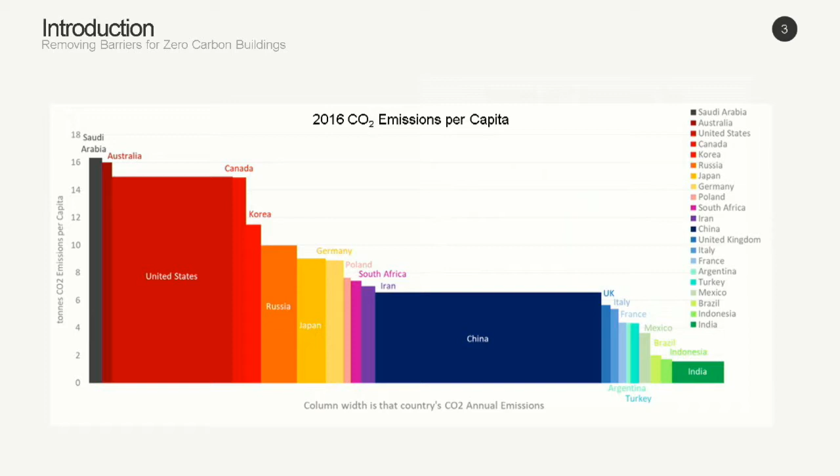Another important factor in what we're talking about in the building sector is that our buildings in cities like Toronto and other urban areas are actually responsible for over half of the greenhouse gas emissions. So 52% as of 2017 in the city of Toronto, GHG emissions are coming from our buildings. The other significant pieces are transportation and waste, and really the biggest factor is heating our buildings for space conditioning and domestic hot water.

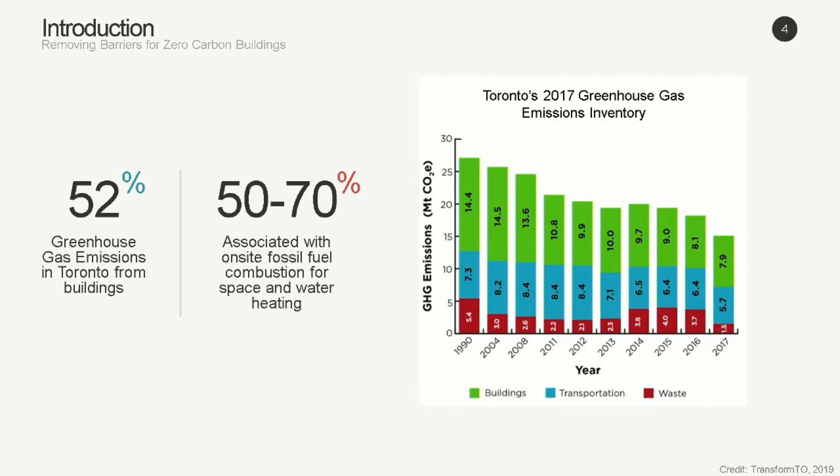That largely comes down to combustion in our buildings. We've got these big natural gas boilers that we use to heat our spaces and condition our domestic hot water. So really, a big area for opportunity in the building sector, particularly in the way that we heat our buildings.

Our mayor, John Tory, declared a climate emergency. This was unanimously agreed on by City Council — I can't remember the last time City Council agreed on something unanimously. So obviously there is a lot of political, societal, and even economic drive to make these projects happen, to make our buildings cleaner, to reduce our GHGs as a whole. Our commitment has once again been declared by the city that we need to reach our 80% reduction targets by 2050. This is being taken very, very seriously.

So again, what is it that's actually holding us up? Why have we not gotten there yet? One of the challenges is defining what a high performance building is. I've left that ambiguous because different folks have taken a crack at defining this, and everybody has different beliefs on how we should go about reaching the masses. Certainly there have been a number of efforts that have already worked and continued to drive this movement forward.

First, I want to define the problem here. Let's take a look at some different types of high performance buildings, and we can discuss the pros and cons of getting there before we talk about how we actually implement these things.

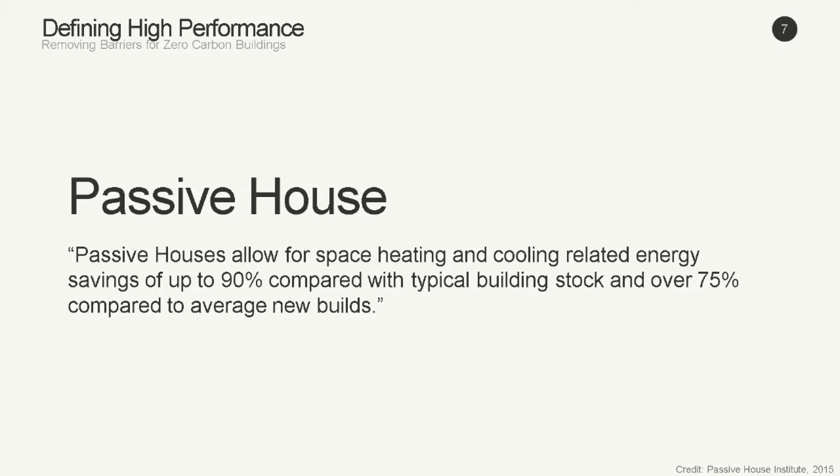Although it's sort of based on really good building science fundamentals, you still have to get certified pieces, components, windows, HRVs, things like that, which makes this a bit of a challenge and not necessarily for the masses quite yet. There's still a lot of barriers getting in between us and this final product.

And they retrofit this building, and it's going to meet the International Passive House standard. It's still under construction, and one reason is that they had to order all of these Passive House certified windows, which can really hold up the process. Again, when we're trying to get these buildings out to the masses, putting barriers like that in front of us can be a big challenge. So it's doable, but it becomes a challenge on its own.

The other part of this to remember is that we've not necessarily gotten rid of all of our energy. We've significantly reduced it, but there's still a fraction that's going to remain. So if we think about getting to the next level, we can think about things like the Living Building Challenge from the International Living Future Institute. There are many petals to the Living Building Challenge, but one particular petal of interest here is the energy petal.

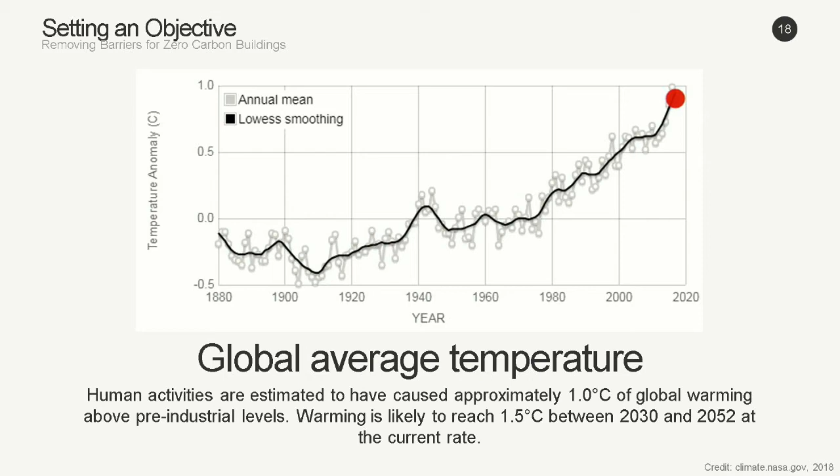We're starting to see these trends year over year: hottest year on record, extreme temperature broken again, dry seasons, forest fires—all this is really coming to the forefront, and the data is right in front of us. This chart, again from NASA, shows the warming trend over the globe, and it's very striking—you can see that year over year we're continuing to get warmer.

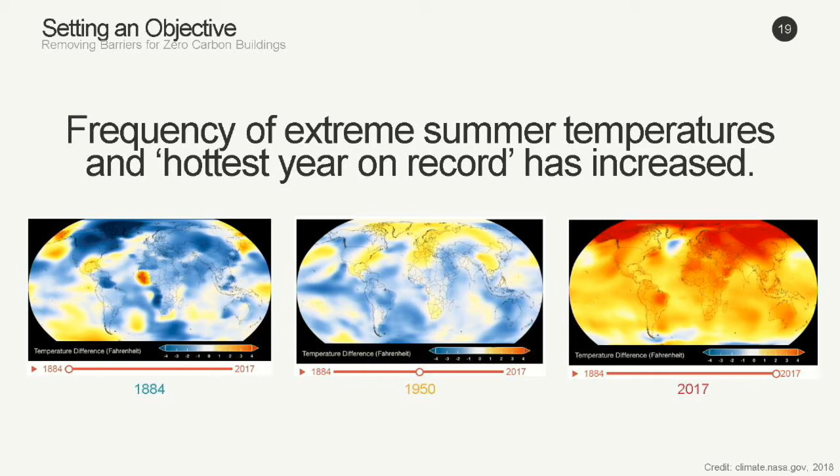But as we approach our modern era, we see this exponential jump in our concentration of CO2 in the atmosphere, and this is really the alarming point here—you can see our numbers are approaching 400 parts per million.

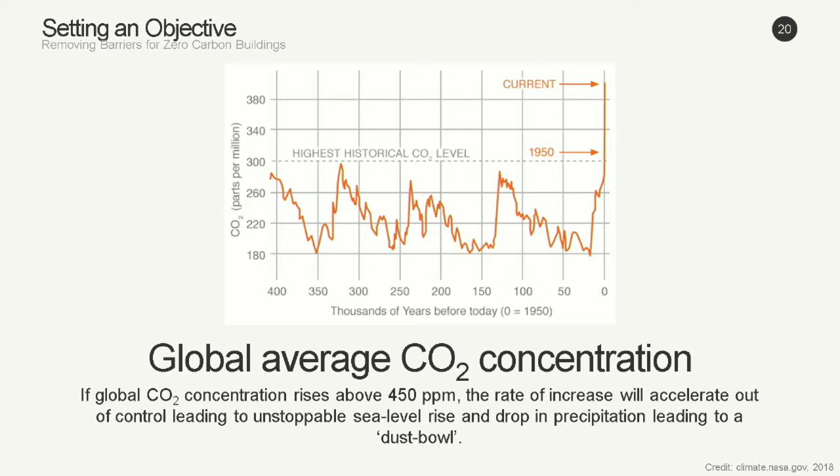The big issue here is if we let this CO2 level get above 450 parts per million, we're going to have this irreversible cycle. It's going to get to a point where the rate of warming accelerates beyond what we can control, basically beyond recovery, to a point where we have sea rise levels that become very dangerous, as well as what they call dust bowlification - extreme periods of drought leading to water shortage and eventually food shortage.

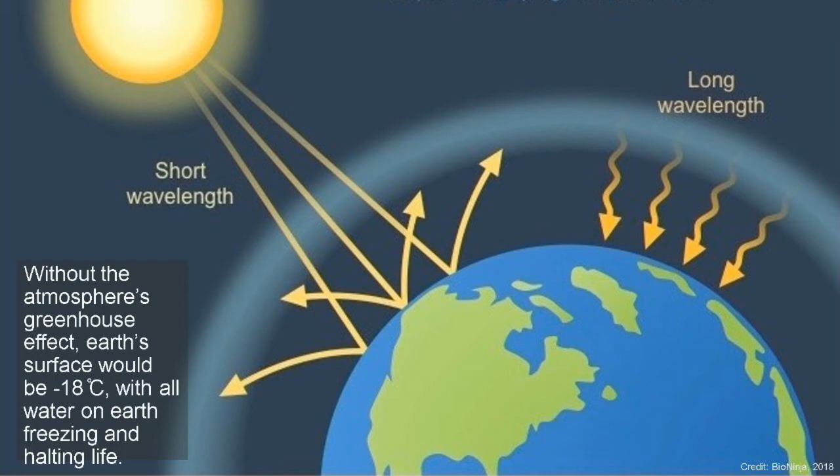So if we look at the science of what's happening here, we start with this image of our Earth and our atmosphere. The atmosphere is really, really important. If the Earth did not have the atmosphere around it, the average temperature on Earth would be minus 18 degrees Celsius, which would basically mean all of our water would be frozen and life on Earth would cease to exist. So this whole atmosphere causing this greenhouse effect - we allow the radiation from the sun to get into our atmosphere, it warms the surface of the Earth, and then as that heat tries to escape, it gets captured by the atmosphere. So this greenhouse effect is really one of the reasons why we're all here today. Really crucial to our life.

What gets really dangerous here is that as we inject more and more CO2 into our atmosphere, it starts to drive a cycle that is somewhat self-propelling. As we add more CO2 from things like coal plants and transportation, it starts to warm the atmosphere. That warming starts to melt the ice, and ice, which is light and reflective, instead of bouncing solar rays back into space - when the ice melts, what we now have is dark water and dark land that will start to absorb that heat energy. So this self-propelling cycle of heating is causing ice melting, which is causing more heating. We're starting to see this runaway effect from that.

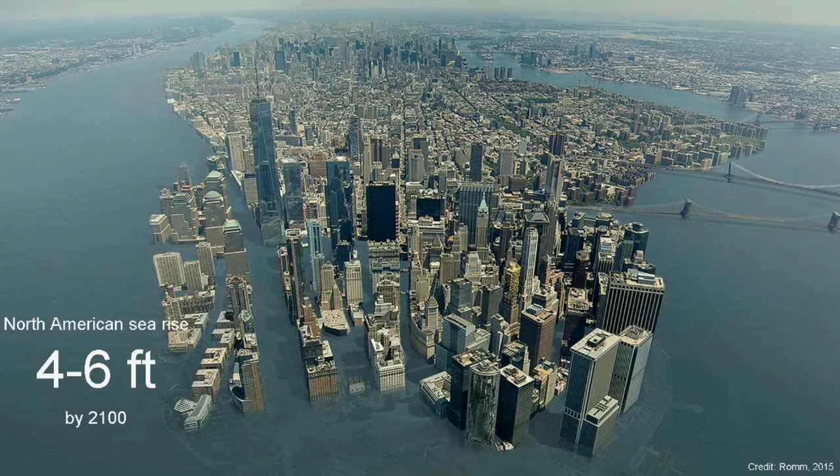Again, there's this issue happening, and the folks making decisions, these big businesses, are even starting to take note. So not only is that sea rise event a potential threat, this risk of destructive events is another big threat. And I would say that this is actually the biggest issue that we're facing here.

When you think about weather events and climate events, there's sort of an 80-20 rule or a 95-5 rule of destructive activity. Events like mega hurricanes show a disproportionate amount of damage done by very few. So the Katrinas, the Sandys, those few hurricanes that typically would happen maybe 1 in 100 years, doing 80-90% of the damage, are now starting to happen more and more frequently.

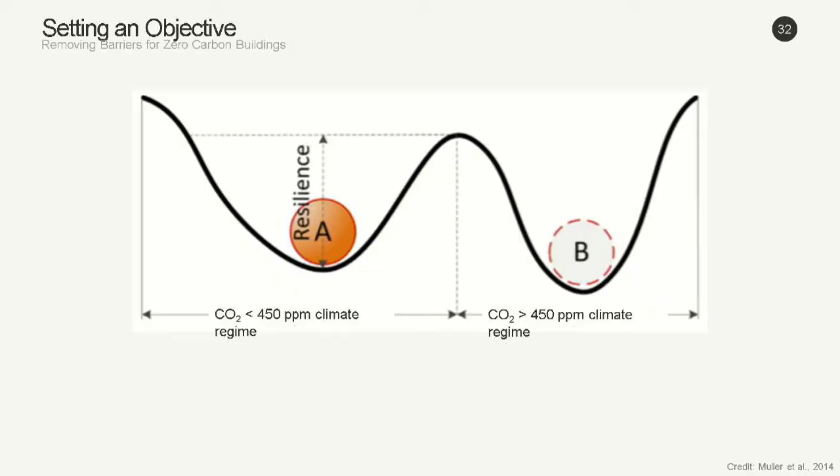Instead of thinking of this 2-degree or 4-degree warming condition where we can all sit on the beach, we need to be careful of this potential future where we have mega floods, mega droughts leading to food shortages, leading to scarcity and competition. And the time is to act now.

Here's an image of something we call a climate regime shift, where our world that we know is living in this left-hand side, where we've got our atmosphere in an equilibrium maintaining the conditions we're used to. If we shift that CO2 across to the right and get out of our current equilibrium into a new equilibrium, we're going to start to see the damage I just described, and it's going to be a very hard, if not impossible, task to reverse that trend.

So, when we think back to my original question - why have we not done this yet - this is kind of how I see this problem, and why now is the time to act. We certainly need to take care of this before we get into this unprecedented climate regime on the right-hand side. So the other big question, now that we've established the main reason we're doing this, is: how do we get these design principles adopted? How do we get people to buy in?

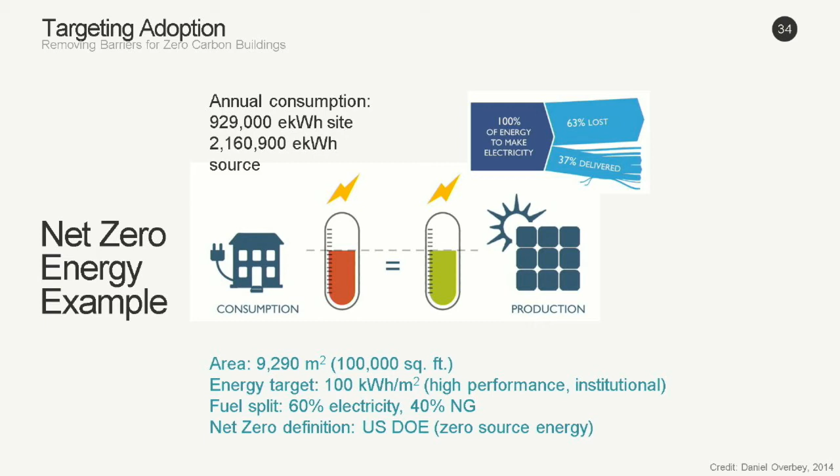Given this situation, we would end up using just shy of 1 million total kilowatt hours of energy over the year. And so to meet this net zero energy definition posed by the U.S. Department of Energy, I won't poll the audience here, but just think in your head, how much photovoltaics do you think you're going to need to offset this building? A few panels, a lot of panels, just put that number in your head.

So it turns out the answer is 3,900 square meters of photovoltaics needed. That's on the order of a football field requirement of PV panels. That's a lot of PV, right? You can see that the investment required there is about $1 million or a little over $1 million to offset all of the energy.

And so we've seen examples of this. If you look at, for example, the Bullitt Center, or even Mohawk College, which I know I said was net zero carbon, but they're also in fact net zero energy. The trend that you see is that a building of that size, typically anything over 4 stories especially, is almost impossible to outfit with enough photovoltaics to reach net zero energy.

And so the trend that you end up seeing here is you have the entire building covered with PV, and then you also have 3 or 4 buildings or a surrounding area also covered with PV. So this, in my opinion, is quite a challenge, and certainly any building that is in a dense urban area that's very landlocked is not going to have an easy time finding this amount of area. Apart from the cost, just the area to actually put this many PV panels on is going to be really, really challenging.

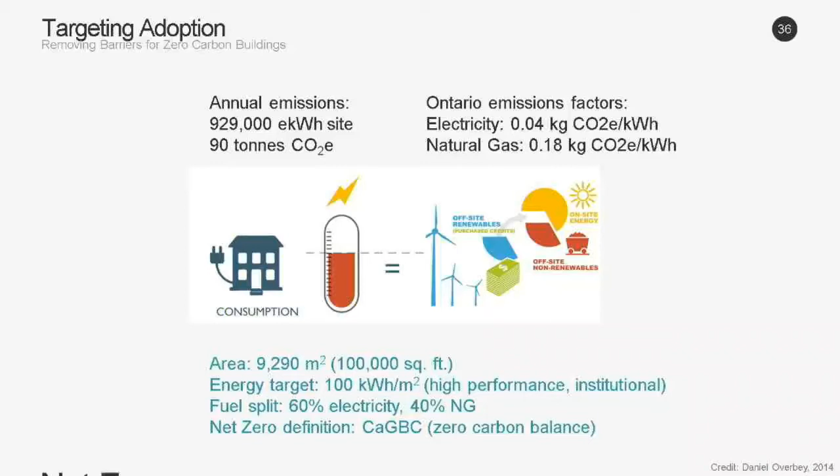So now let's jump over to net zero carbon. Again, remember, we're thinking about the ability to actually deploy this stuff. How adoptable is this? If we take the exact same building, 100 kilowatt hours per meter squared on 100,000 square feet of institutional building, what is the requirement for a net zero carbon building?

We're going to take the CAGBC definition of net zero carbon, which was introduced about 2 years ago to the market. You guys can go do some reading on what that entails. But basically it says you must have a minimum of 5% renewable energy on site to offset your on-site energy, but then you can look to other places to get the rest of your carbon offset. So that includes basically things like off-site renewable energy, renewable energy certificates, which is sort of buying the right to the environmental attributes of an off-site generation plant. So if you've got a solar farm down the street, for example, you can basically be buying those electrons to offset the carbon on your building.

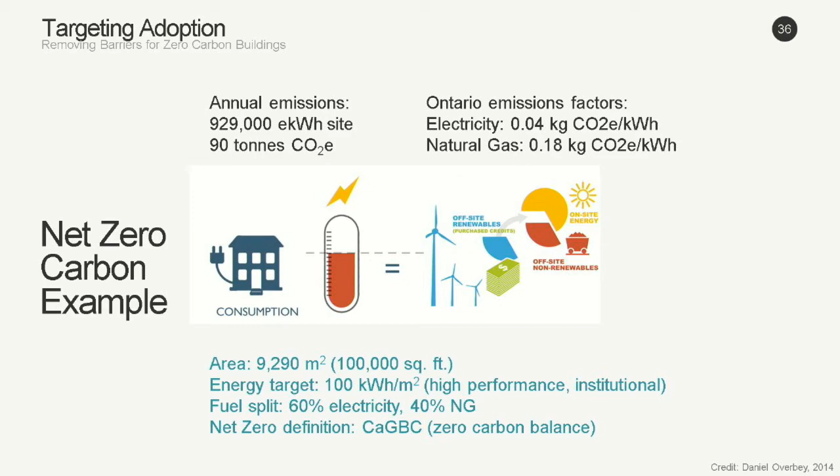So again, if we think back to this net zero energy versus net zero carbon issue, and we said that the last example had approximately a football field of PV requirement, I'll give you a second here to think about what the requirement is for this. It turns out that it's much more approachable. Instead of needing a football field worth, we need 16 by 16 square meters. This is something you could very easily put on your roof or on your building somewhere. And the capital cost here is going to be under $100,000. So certainly, if you're thinking about CapEx costs, this is something that's a little bit more approachable.

The one difference here is that instead of putting the upfront cost to buy your PV cells, you're sort of buying the rights to your renewable energy credit, or your renewable energy certificate, and offsetting in another way. So instead of putting the upfront capital investment, you're taking this net zero carbon approach through an operating cost. Now, again, there may be some critics that say, well, okay, you're buying your way out of the situation.

I would argue that the net zero energy strategy is very unrealistic for most buildings. If our goal is carbon reduction, this is a much more palatable approach for many cases. So when we go back to that question of which is the right definition, there's of course no right definition, but the question should really be which approach aligns with our objective of carbon emission reduction for climate change, and what can we get to the masses with. I firmly believe the answer lies in a net zero carbon approach.

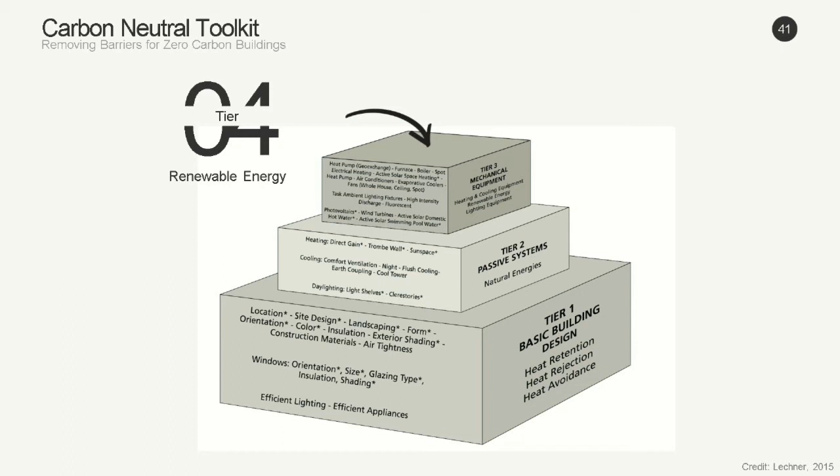The first step is reducing your load. Remember we talked about that 100 kilowatt hour per meter building - the first step is targeting that number, targeting energy efficiency and heating and cooling load. Once you've got that load down and energy demands reduced, then you can think about putting on the right mechanical system, and finally think about generating on site, only after all of the rest of the building is taken care of.

We'll jump through one of these examples, bringing it back to the Passive House folks. Passive House is perhaps not the right certification approach if you're thinking about what to call your high-performance building, but certainly this is the best approach in terms of building physics, and this is very fundamental in its strategy in reducing your heating and cooling load.

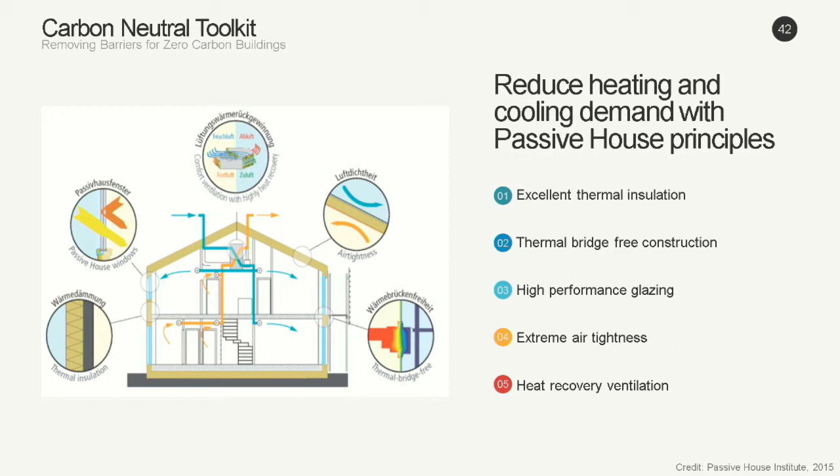This is things like good insulation, mitigation of thermal bridges, really good windows, really airtight buildings, and good heat recovery ventilation. That's going to bring our heating and cooling load down to a point where we can start to address it with a much smaller mechanical system.

The next step is to reduce our lighting loads. Here's an example of somebody who's got a light shelf that'll help bounce daylight into the back of the room. Interestingly, once you get into these really high performance buildings - typically for an average building the highest load is heating and cooling - once we get to these high performance buildings, our lighting load often becomes one of the worst energy sucks. We get to a point where we can't reduce any lower and still work in a lit room, we'd be working in the dark. So that becomes one of the highest loads.

Same story goes for our equipment load. That's the next piece we need to address - after heating and cooling loads, get our electric loads as low as we can. This means eliminating these pieces where possible. Of course if you're a data center or a commercial kitchen, that's not possible, so we look for other ways to use that energy, like heat recovery or load sharing, where we take heat that would have been rejected from one zone and put it into another zone.

After we've addressed all of that, we want to start looking at a super efficient mechanical system. Instead of putting in a natural gas boiler that's 70, 80, 90% efficient, if we can look at a heat pump, all of a sudden that efficiency goes from 90% to 300%, 400%. So some really interesting technology out there allows us to drastically reduce the energy required for our heating systems.

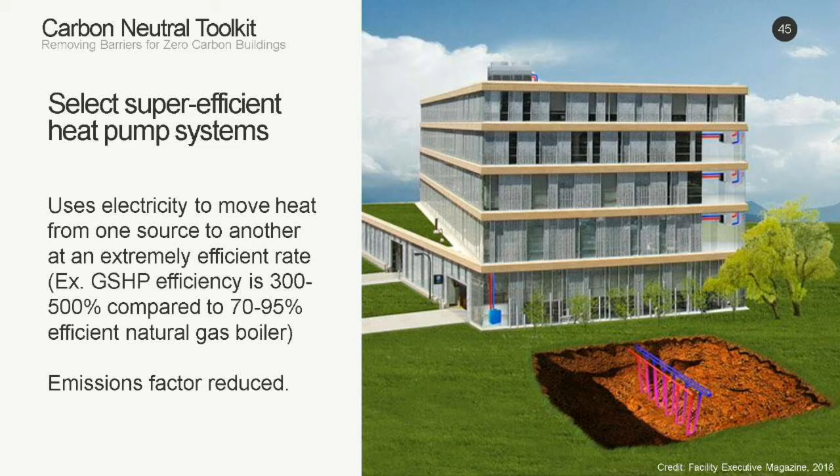The other really cool thing is particularly in provinces like Ontario, British Columbia, Quebec, where our electricity grids are quite clean, right? They have a lot of renewables, or in Ontario's case, a lot of nuclear energy. Switching to electricity is a really good way to reduce our carbon emissions. We fuel switch from on-site combustion to clean electricity, so we get a bump in our emissions reductions there again.

And then finally, on the broad scale, once we go beyond the scope of one building, we want to start looking for opportunities to get into district systems. This is an example of something that would be an excellent case where we've got a really big IT load, for example, from a Facebook or a tech company that would have a bunch of servers. Instead of rejecting that heat out into the atmosphere, we can start grabbing that heat and putting it into our neighbor's building, which is asking for that heat, and do some really cool things. The other way to do that, of course, is with a district energy system where we save on infrastructure and can have a more efficient system to distribute to the local community.

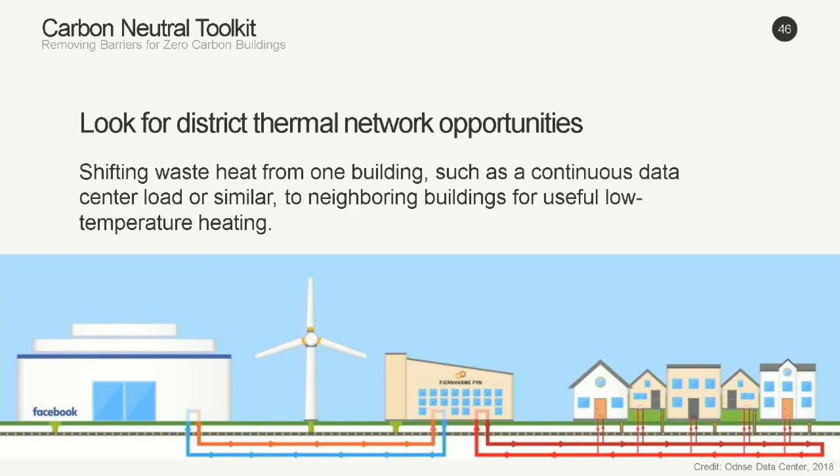So once we've addressed all of those pieces, then and only then do we want to start looking at renewable energy. There are tools like PV Watts or other online calculators, or you can go into your textbook and figure out how to do this. But once we've gotten the loads as low as we can, then we want to start thinking, okay, how much room do we have on the roof or adjacent land to start putting on PV?

There are certainly other renewables like solar hot water. You've all probably heard of wind and these sort of other things. Typically, bang for your buck, PV is the way to go these days, not only in terms of economic reasons, but in terms of load matching. So solar hot water, for example, you have a lot in the summer, you don't need that much in the summer. You need a lot in the winter, but you don't get as much in the winter. So generally speaking, our renewable energy strategy on a building scale is going to be photovoltaics.

Once you can start going outside of your boundary, you can start to look for things like bigger generating production plants. And then the last piece of this is the competing strategy between photovoltaics or on-site renewables and renewable energy certificates. The general approach here should be, if we're going to try to get to net zero carbon, you want to balance that space requirement and capital outlay requirement with how much you can put onto your operating side to buy your clean energy at a bit of a premium.

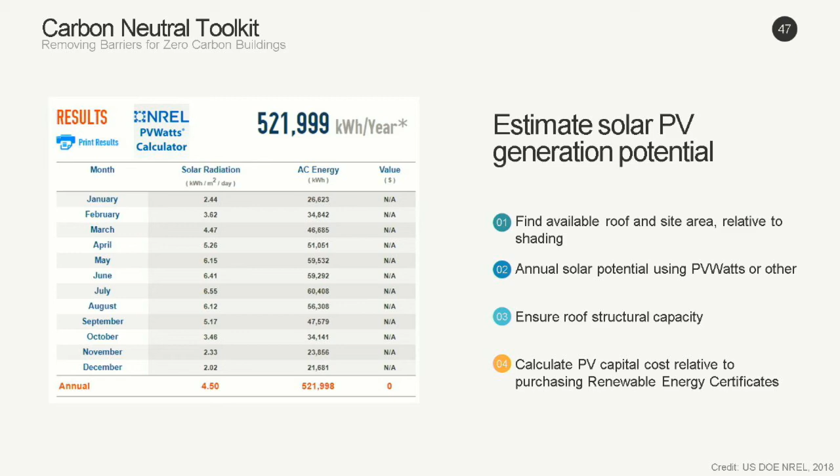So the last piece of this, once we've got this formula, is to ask how much it costs. Obviously, that's one of the biggest challenges, and certainly in my world, this is always one of the biggest hurdles that I always hear. Yes, this is great, we know we want to get to net zero, but how much does it cost? Especially when you're talking to real estate developers, the dollars and cents are always on their mind. So we've got some ways to approach this. Obviously, with good engineering, you can do a design of A versus B and cost those out and compare them.

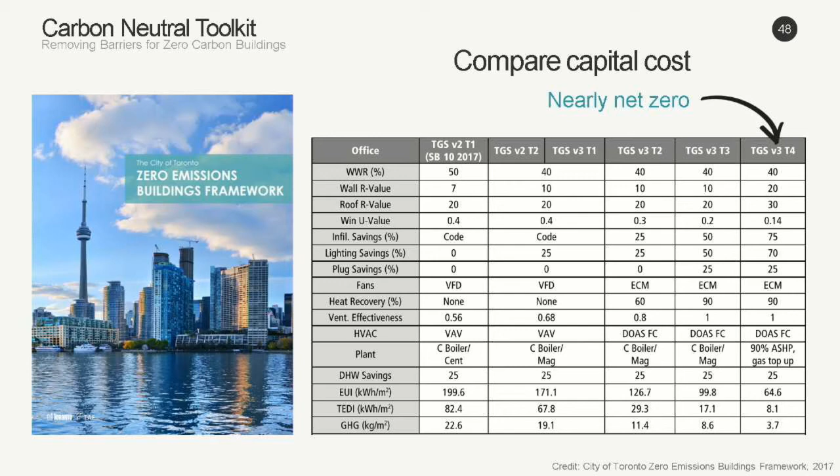But we've also got some work done by the City of Toronto, some consultants who they worked with, started to put together these tables that said, okay, this is the Toronto Green Standard. Lisa King is speaking tomorrow, or Thursday, or Friday, and she'll probably tell you more about the Toronto Green Standard. But this is basically the minimum standard for getting a new building built in Toronto. The standard is getting harder and harder to meet every few years until we get to a point where we get to net zero, nearly net zero, with a really good envelope, really low loads in the building, etc.

So they've done all this work to say, okay, if we're going to get to this Tier 4 Toronto Green Standard, which is our nearly zero building, what is the increased capital cost? And you can see there that depending on the tier that you're going for, the capital increase they've set at around 2 or 3%. The one interesting thing I'll point out here is that the overall increase in capital cost actually goes down from Tier 3 to Tier 4.

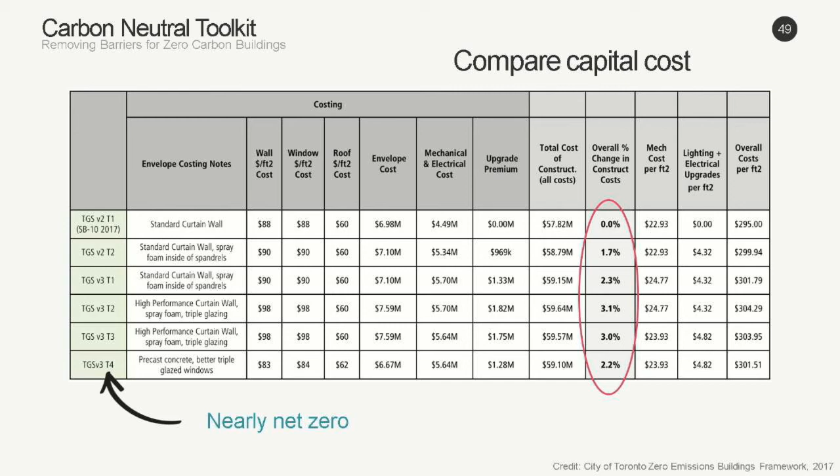What that's representing is the fact that once you make a quantum leap into a really good building envelope, your requirement for a mechanical system comes down significantly. So there's actually cost savings there. Some really interesting data that you guys can take a look at and start to put into your models.

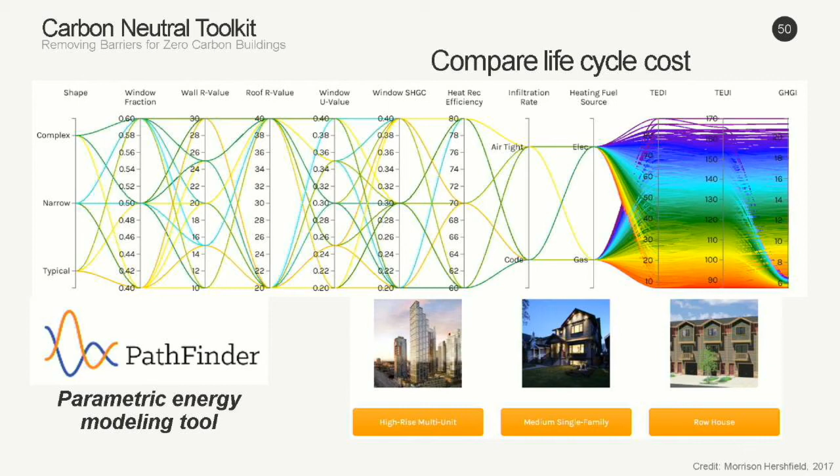And then finally, once you have all these pieces together, you can start to do some really cool stuff with parametric analysis. This isn't something you should be throwing darts at when thinking about design. You can actually model all these systems out, put the capital costs and life cycle costs associated with all these designs into a model, and figure out what the optimal solution is.

So one of the topics of this conference is local solutions, and I want to spend a minute talking about the work I'm doing now. I told you my background was in the net zero world, and that's what I'm working to get toward and bring to the market. I work with a group called Subterra Renewables.

At Subterra, we're ultimately trying to change the way we heat our buildings in North America. I showed you that stat at the start of the presentation, where our buildings in our cities are using over 50% of the energy, and of that energy, most is heating energy from natural gas boilers. So we're really trying to change how we think about heating and cooling our buildings.

And the solution we're proponents of is geothermal heating and cooling. To give a bit more in-depth description, we're partnering with developers who are building new projects, and saying: instead of putting in your conventional boiler and chiller, let's put in a renewable energy system. Let's put in a geothermal system, which entails drilling a number of holes quite deep into the earth, 500 to 800 feet.

And using that earth as sort of a heat battery over the course of a year. In the summertime, when we need to cool the building, we remove that heat from the building and store it in the ground. In the wintertime, when the building needs heat, we take that heat back out of the ground and put it back into the building.

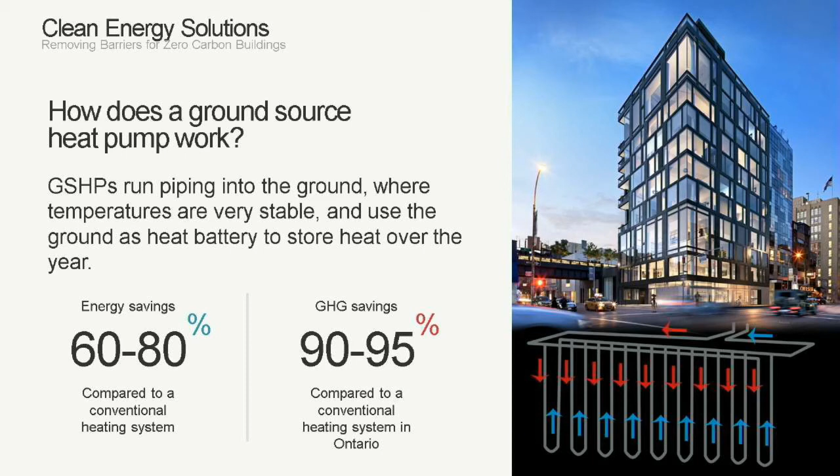These systems, relative to a boiler, are 4 or 5 times more efficient, which results in a 60 to 80% reduction in our heating costs. And not only are we getting that energy efficiency bump, we're getting a big bump in our emissions reduction because we've fuel switched from natural gas to electricity. And in Ontario, we've got a rather clean grid that can provide that electricity. So a lot of momentum is pushing us to this solution.

You speak with the smart energy consultants, and they'll tell you have two options. If you want to get to the next level in 2022, you're going to have to either put triple glazed windows in all of your buildings, which is big money, or go to a heat pump solution to get there. This is one of the things we feel we're still a little early into the market, but once 2022 hits, this is going to be the way all of our buildings are going to go, and we're going to be ready to take that on.

So again, there's a big push socially, politically. This is a standard you need to hit to actually build a building. So what's the challenge? Well, again, the big challenge is always the economics for us.

So what we do at Subterra is basically offer a third-party utility model. And what that means is that once we partner with the developer, we basically put up the financing for that system. We own the system over a long-term contract. We operate it, make sure the field is operating correctly, and maintain all of the components.

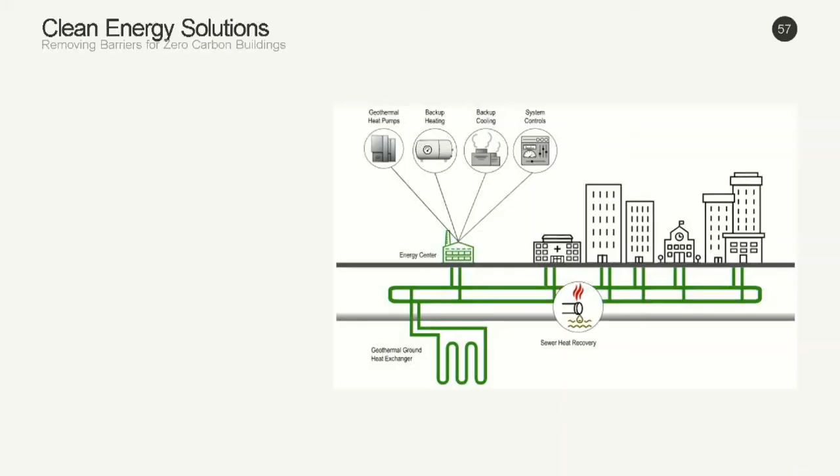These proposals are looking at community plans, district solutions where we can have one ambient loop, meaning that the temperature of this water is kind of at or around room temperature, plus or minus a little bit. Once we've got this ambient loop running, we can start plugging multiple buildings in. Some of those buildings are going to ask for heat, some are going to ask for cooling, and all of those are going to balance each other out on that loop.

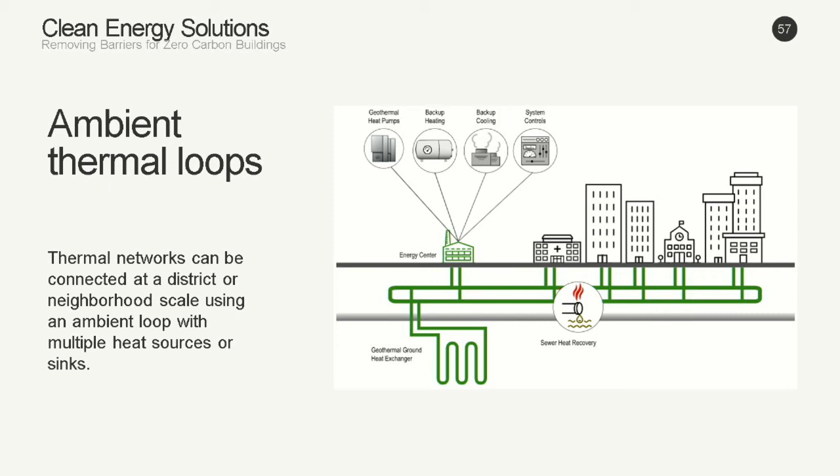Once it does go out of balance, we can start to add heating sources or sinks to that, like drilling geothermal wells, or another thing we're excited about here is wastewater heat recovery, which otherwise would have been wasted, but we can basically grab the heat out of it and distribute it into our building, or vice versa — take heat out of the building and put it back into the water.

So this is really the future direction I think most buildings are going to move — not only low carbon solutions for heating and cooling, but also starting to think about district solutions and load sharing, with some really innovative ways to put heating and cooling onto that.

So to wrap things up here, there's nothing technically stopping us from reaching these solutions. We have the answers. We know how to get to zero carbon. It's really on us to take responsibility of the problem, get out there and actually implement these strategies. I'm hopeful that you folks in the room will pick up the torch and carry that forward. So that's all I have. Thank you guys very much.

Many thanks for that, Matthew. You've given a heck of a lot to think about there.

You mentioned the potential rise in average temperature by 1.5 to 2 degrees. I think what people often forget is that doesn't mean a high of 33 today may be 35 tomorrow. It may actually be closer to, say, Phoenix's 45, because what it means is that the range of temperatures starts to go out of whack. So what is somewhat bearable becomes completely and totally unbearable. If you've ever been to California or Arizona in the hot months, you simply can't go outside if you're not familiar with that kind of temperature.